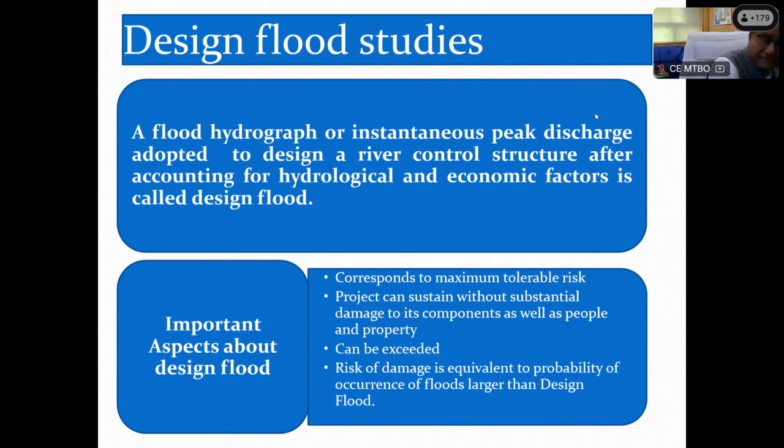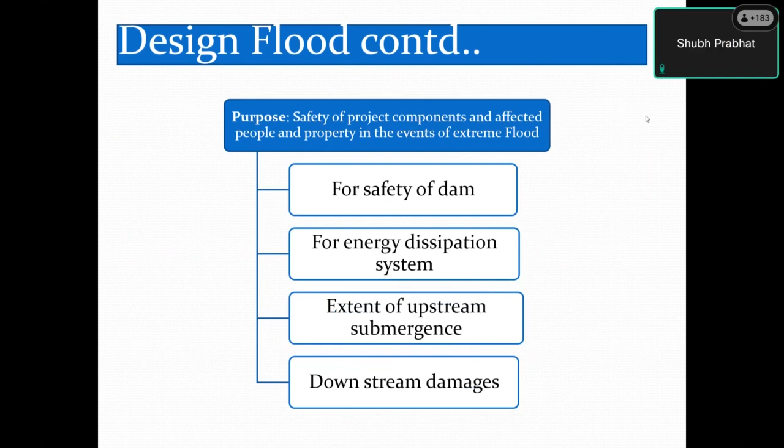Why this problem is coming? मुझे तो क्लिक करना होगा। अगर आप वेट पे जाएंगे तो फिर हाँ। Okay. Okay.

So what is the purpose of the design flood? It is for the safety of the dam, for designing the energy dissipation system, and also sometimes to know the extent of upstream submergence and downstream damages. Normally, if a project is being designed for a probable maximum flood, the upstream submergence shall not be estimated for the probable maximum flood - it depends on the type of settlement of the stream. We can adopt the criteria of 25-year flood or 50-year flood to see the upstream submergence in the form of backwater. For downstream damages, like if a powerhouse is there downstream, to decide its formation level, we again have to consider the probable maximum flood. These are the purposes of design flood estimation.

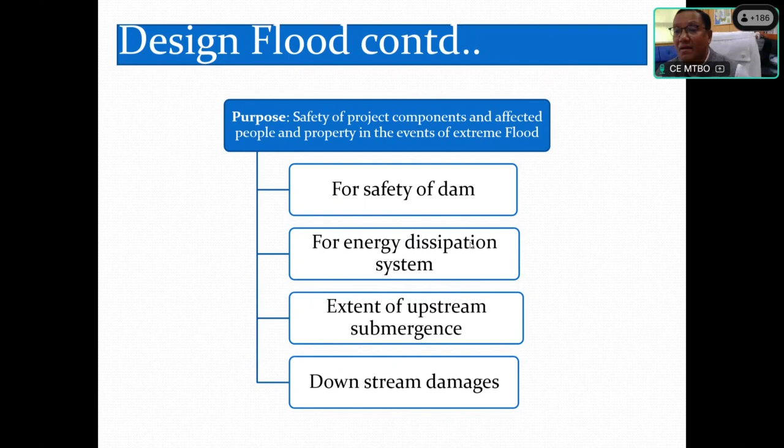Proper selection of design flood is very important, because if we are going to have a very high design flood, then you have to put additional costs for making the spillways. We also have to see the additional cost of structure versus risk of losses to structures, affected people, and property. So we have to think about that.

Now let us come to the point of whether absolute protection is possible. Perhaps that is not possible. If you are thinking like that, that is unrealistic thinking. Increased risk is also not acceptable. So decisions have to be taken somewhere in between.

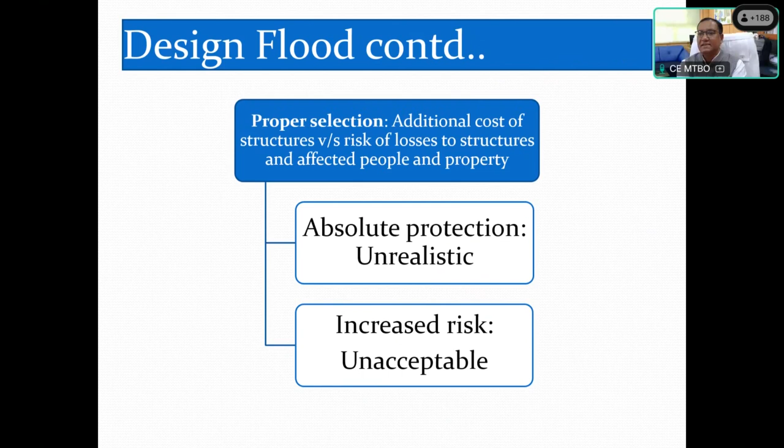Now BIS code has given some criteria, and using those criteria, in India we are following IS 11223:1985 for selection of design flood of dams. As per this criteria, if the gross storage is between 0.5 MCM to 10 MCM (million cubic meters), and hydraulic head is 7.5 to 12 meters, then the structure shall be designed for the 100-year flood.

If the gross storage is between 10 to 60 MCM and the hydraulic head is between 12 to 30 meters, then the structure shall be designed for the standard project flood. If gross storage is greater than 60 MCM and hydraulic head is greater than 30 meters, then the structure shall be designed for the probable maximum flood.

Now, suppose one structure has a hydraulic head of 28 meters, but the gross storage is 80 MCM or 65 MCM. Here, if any of these criteria is meeting, then the design flood shall be selected according to this given criteria of the BIS code. So if your gross head is 28 meters, but the gross storage is more than 60 MCM, then you have to adopt only the probable maximum flood, or vice versa.

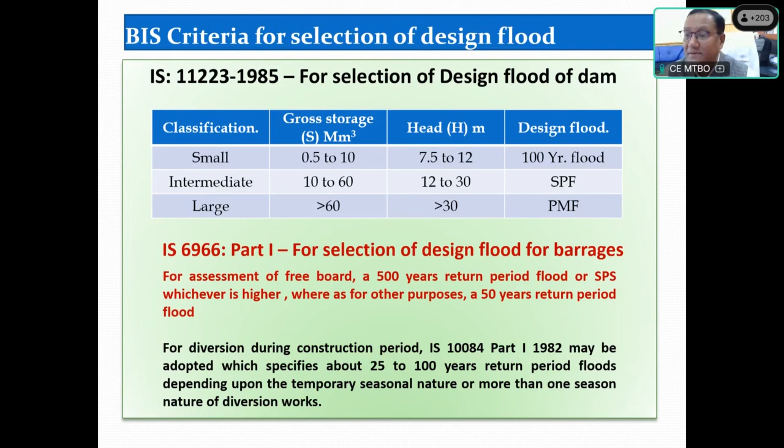After this, now the Dam Safety Act has come in India. As per this Dam Safety Act, the design flood review referred to in clause B of subsection 2 of section 38 of the Dam Safety Act shall be carried out every 10 years. This means for existing dams, we have to go for the design flood review every 10 years, or such lesser period as may be determined by the National Dam Safety Authority.

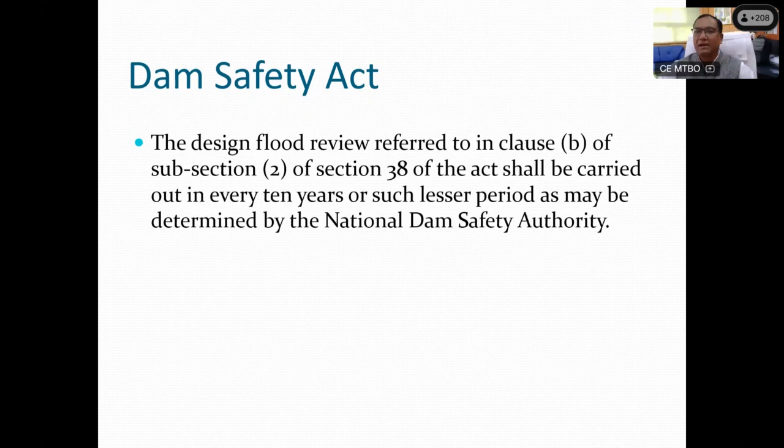Suppose some dam's design flood was reviewed 5 years before, but its design flood has been exceeded this year, then the Dam Safety Authority may recommend that you go for the design flood review again. So minimum 10 years is decided, but depending upon the occurrence of the flood, the National Dam Safety Authority may direct for the design flood review.

What are the different approaches for design flood estimation? Earlier, there were very limited data, so the formula approach was adopted, like Dickens formula, Ryves formula, Nawab Jung Bahadur formula, different types of formulas. But those formulas are based basically on catchment area, and very few observations are available. So those were initial approaches where very limited data was available, and we got some rough estimate. That was the formula approach.

Then came the statistical approach, commonly known as the flood frequency approach. This is a very good approach if you have long-term gauge and discharge data, available for even more than 20 or 30 years. Then this approach can be adopted for design flood estimation. Normally, if the data length is 30 years, you can estimate the 100-year or 200-year return period flood, but we cannot use this 30 or 40 years of data to estimate the probable maximum flood, because its return period may be one in 10,000 years or more. So normally, return periods like 25-year, 50-year, 5-year, 100-year floods can all be estimated using the flood frequency approach.

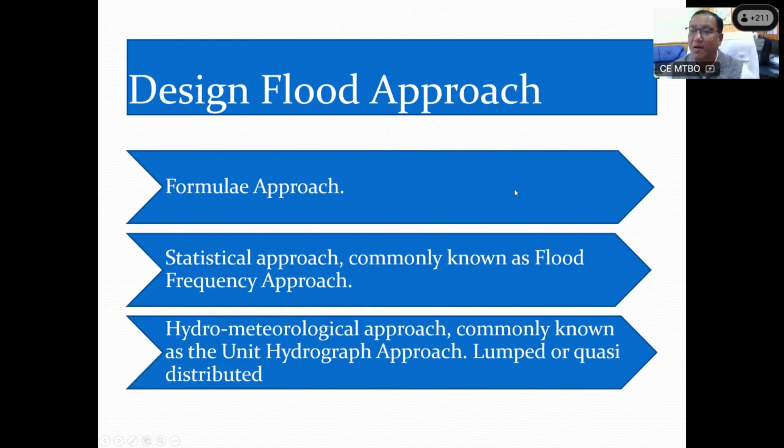Depending upon the catchment size, design flood can be estimated using the hydrometeorological approach, either by adopting a lumped model where a single catchment is used, or a quasi-distributed model where you have to consider a number of sub-catchments of your project catchment if its catchment area is too large.

In design flood computation, I will discuss the hydrometeorological approach here, because most people already know the flood frequency approach. For that, if your flood peak data is available, using Gumbel distribution, log normal distribution, or log Pearson type 3 distribution, you can estimate the appropriate return period flood. Then there are tests like the chi-square test and D-index test to know which is the best fitting distribution for your given data set. Using that, you can go for flood frequency analysis to estimate the particular return period flood.

But in the hydrometeorological approach, we are computing the entire flood hydrograph. This approach involves estimation of the design storm hyetograph or effective rainfall hyetograph, normally called ERH, then derivation of the direct runoff hydrograph from the catchment response function, the unit hydrograph. So this design flood computation involves modeling the transformation of rainfall into a flood hydrograph, and translation of that hydrograph through the watershed to the outlet point.

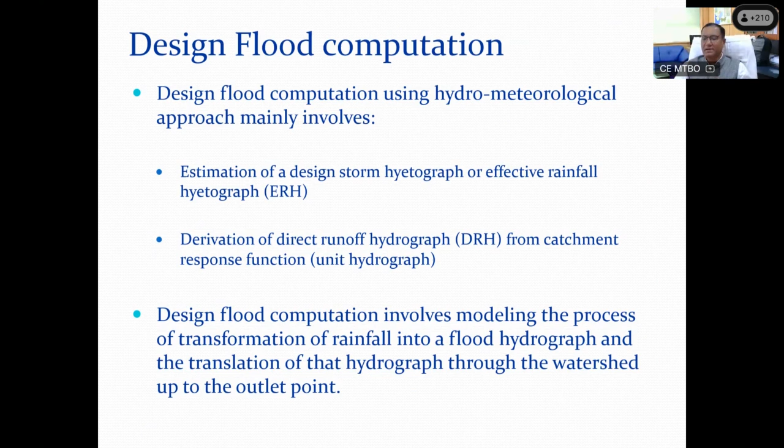From where can you get the design storm depth, because this is the most important part of design flood estimation? The Central Water Commission, in association with the IMD, has published a number of PMP atlases. These PMP atlases cover the entire country. Central Water Commission has published the PMP atlas of the Ganga Basin, Godavari Basin, and Krishna Basin. This was prepared by IMD in the year 2018.

This Ganga and Godavari atlas has been published by Central Water Commission. Then for the Narmada, Tapi, Sabarmati, and Luni river systems, and rivers of Saurashtra and Kutch regions including Mahi, this has been published by Central Water Commission. Then the Mahanadi and adjoining river basins atlas has also been published by Central Water Commission, as have the west-flowing rivers of the Western Ghats and Kerala, and the Cauvery and other east-flowing rivers. Only the Krishna Basin and the Indus Basin atlases have been published by IMD.

This is a very wonderful document because a lot of effort has gone into it. It is a joint effort of a number of experts sitting together, and it took around 3 to 4 years for them to prepare this document.

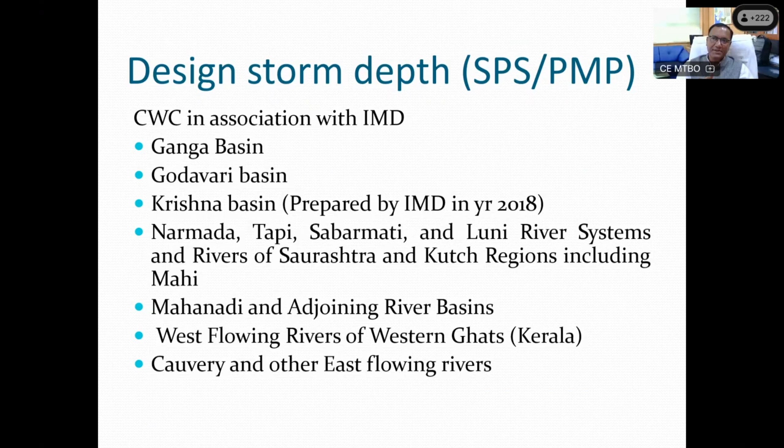You can directly read the value of your standard project storm or probable maximum precipitation using these PMP atlases. What is the beauty of these PMP atlases? For 1 day, 2 day, 3 days, the severe-most storms that occurred are in an inventory, along with the isohyet of those storms and what was their areal extent, and where was the 'eye' location - meaning the location where the maximum depth has been recorded.

For example, this is a 2-day storm in Ganga Basin which occurred during 10th and 11th July 2004. This 2-day storm isohyetal pattern you are seeing here. Similarly, you will get the 1-day storm, 3-day storm, for whatever the threshold limit is.

When I was also a member of that committee guiding the publication of these PMP atlases, in the first instance a threshold value was taken. Suppose for Ganga Basin we considered a 1-day threshold value of say 250 or 300 millimeters. Once this threshold value is decided, all storms with a 1-day recorded depth of more than 300 millimeters were selected. Then the depth corresponding to the second day and third day was calculated - so 1-day, 2-day, and 3-day storms were first selected, and then their detailed isohyets were prepared. This is very useful because making one isohyet itself takes a lot of time if not readily available, and these are historical records - storms occurred in 2004, 2008, 1938.

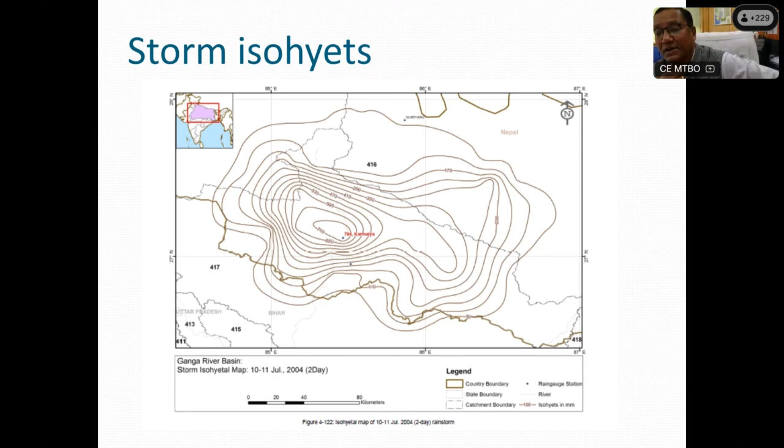At these grid point locations - Ganga is a very big basin with a catchment area of about 10 lakh square kilometers - so at every 1 degree by 1 degree grid, these grid point locations are marked. Once you have mapped your catchment area, corresponding to the centroid of the catchment you can note down the latitude and longitude. Using this figure, you will easily be able to finalize which grid location should be considered for your PMP or SPS value.

This is the map for that, showing the latitude and longitude. Once you have the latitude and longitude of the centroid of your catchment, you can decide the grid. Once the grid is decided, these are the PMP values - this is the 1-day areal PMP estimate for 500 square kilometers. Similarly you can get values for 100, 500, 1000 square kilometers - these areal PMP values are readily available, and from here you can get the design storm depth values.

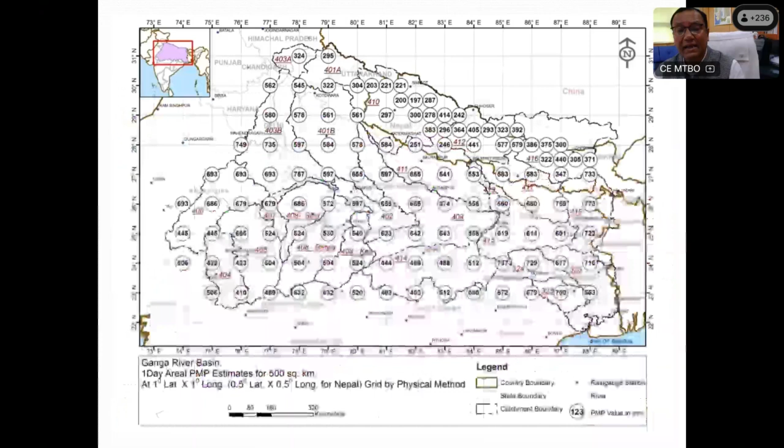So PMP and SPS both, now in tabular form. Once you have finalized your grid location - like G for Ganga, grid named 409-2 - using this map, based on the latitude and longitude of your entire catchment, you can know your grid location and then use this table. Depending on catchment area, suppose it is 800 square kilometers, you work out the SPS value for that. For 500 square kilometers the SPS value is 688, for 1000 square kilometers it is 664, so for 800 square kilometers you can interpolate.

So regarding 1-day or 2-day storm, depending upon the time base of the unit hydrograph, you have to select whether to go for the 1-day storm depth or 2-day. If the time base of the unit hydrograph is between 24 to 48 hours, then you have to go for the 2-day storm depth. So here, the 1-day storm depth corresponds to 31st August 1915, and the 2-day storm corresponds to 31st August and 1st September 1915. So 1-day and 2-day values you can get from these tables, and from these tables, areal value corresponding to area. If your area is not given here and lies in between, then you can interpolate it.

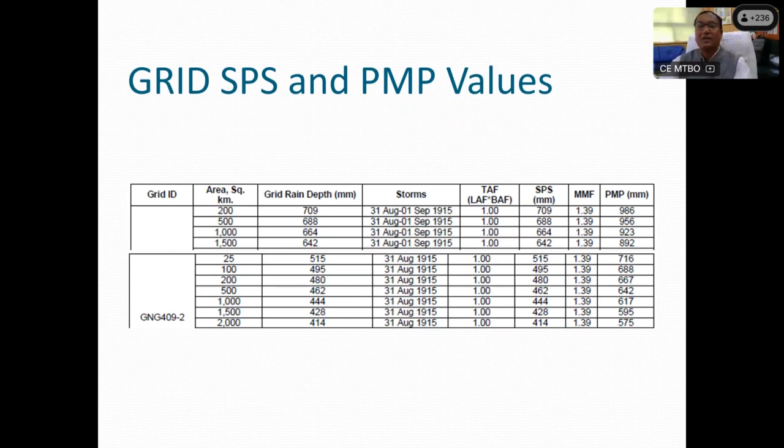Now I've told you how to get the design storm depth values. Next, suppose your project is qualifying for a 100-year return period flood. In that case, IMD has published the isopluvial map. Using that map, you can take the value of 24-hour rainfall depth for different return periods - 50-year, 100-year, whatever is required. So if you want to estimate the 100-year return period flood, you have to take the 100-year return period rainfall value from the isopluvial map published by IMD.

In our PMP Atlas, the 100-year 1-day and 2-day depths are also given station-wise. But the beauty of the isopluvial map is that, based on the latitude and longitude of the centroid of your catchment, you can easily read what the 100-year return period rainfall value will be at that location.

Now, next comes the unit hydrograph. The catchment response function used can be either a lumped system model or a distributed system model. In the lumped system model, as I've already explained, the unit hydrograph is assumed to represent the entire catchment area. But in a distributed model, the catchment is divided into smaller sub-regions, and a unit hydrograph is worked out for each sub-catchment. Each sub-catchment behaves as a lumped model, and from the outlet of one sub-catchment to another, the flood has to go through channel routing.

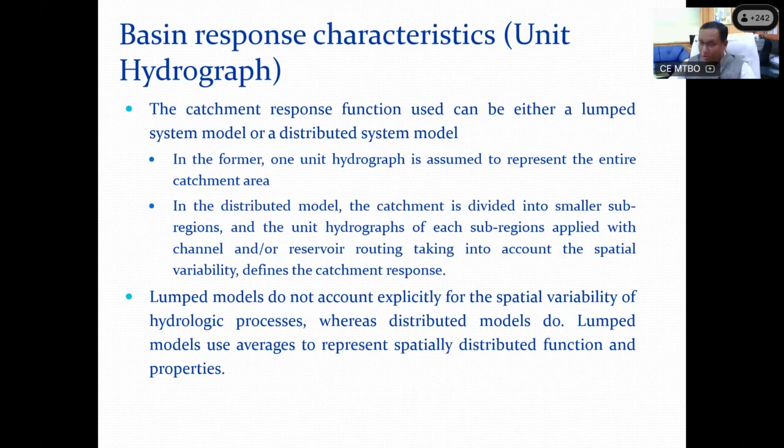Lumped models use average values to represent the spatially distributed function and property. But if the catchment area is small, say 2000 or 3000 square kilometers, a lumped model is more than sufficient. But if your catchment is 20,000 square kilometers, a lumped model is not going to work - you have to go for a quasi-distributed or distributed model.

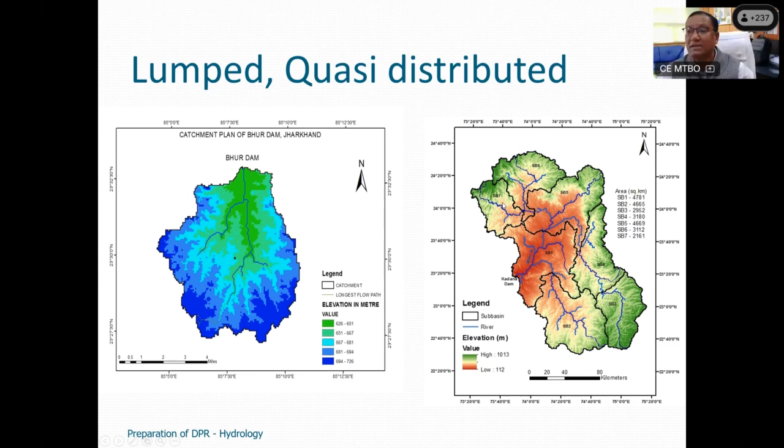This is the example I was telling you about. This is a lumped model - a dam is located here, and this is its catchment area. So here, single catchment, this is a lump. But what you're seeing now is for the Kadana Dam of Gujarat, where the total catchment has been divided into 7 sub-catchments. Consider this sub-catchment - how is this going to work? How do you set up a model for this?

In this setup, each sub-catchment has one outlet. Take SB2 - here the lumped response is received, meaning its flood hydrograph is obtained at its outlet. From this outlet up to the dam site, this flood hydrograph, received at junction 2, will get channel routed through reach R2K and arrive at the Kadana Dam site. There, the lumped response of SB1 will also come, and this entire system response, through lumped and channel routing, comes to junction 5, and from junction 5 it will again be channel routed and arrive at Kadana Dam. So at Kadana Dam, you see 3 dotted lines representing 3 responses: one is the lumped response, another is the channel routed response through R2K, and another is the channel routed response through R1K. These are then combined together to give the flood hydrograph at the dam location.

Like that, this distributed or quasi-distributed model works.

Now, what is the unit hydrograph? This is the response of any catchment for 1 centimeter of excess precipitation. 1 centimeter means 1 unit of excess precipitation in India. Like in our flood estimation reports, we use 1 centimeter depth.

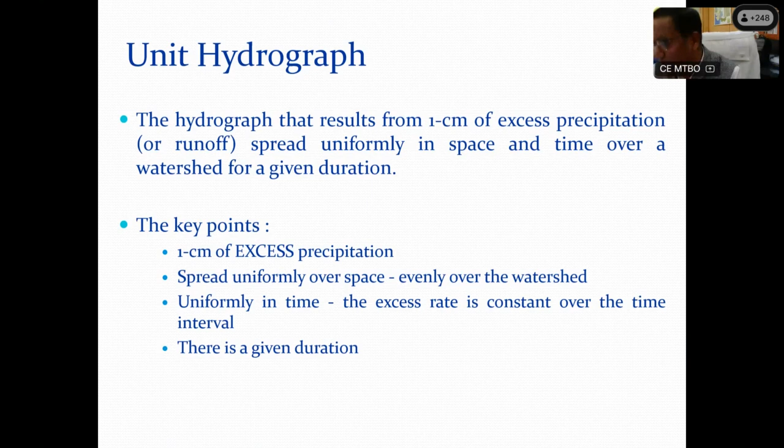If your unit hydrograph is of 2 hours duration, then for convolution you need your rainfall excess ordinate also at every 2 hour duration. This is because the principles of linearity and superposition have to be ensured when going for convolution. So this is very important - you have to keep that in mind.

Now, how can you derive the unit hydrograph? From the observed hydrograph resulting from a storm which fulfills two basic conditions: the rainfall is more or less uniformly distributed over the basin and has a reasonably uniform intensity. Such a hydrograph will generally form a single and sharp peak. But such events are very rarely obtained.

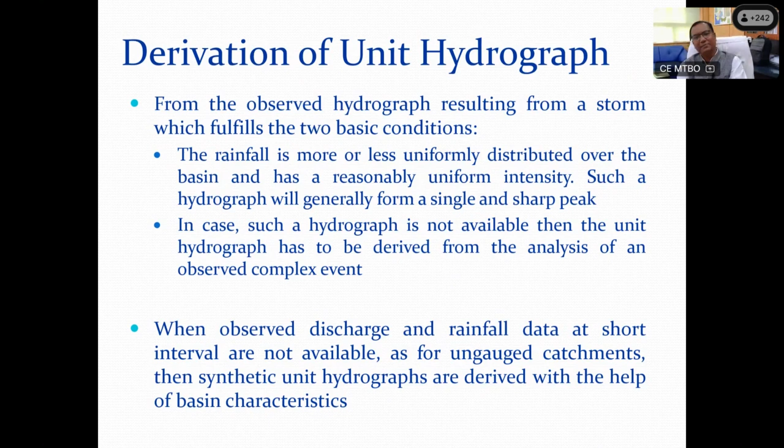In case such a hydrograph is not available, then the unit hydrograph has to be derived from the analysis of an observed complex storm.

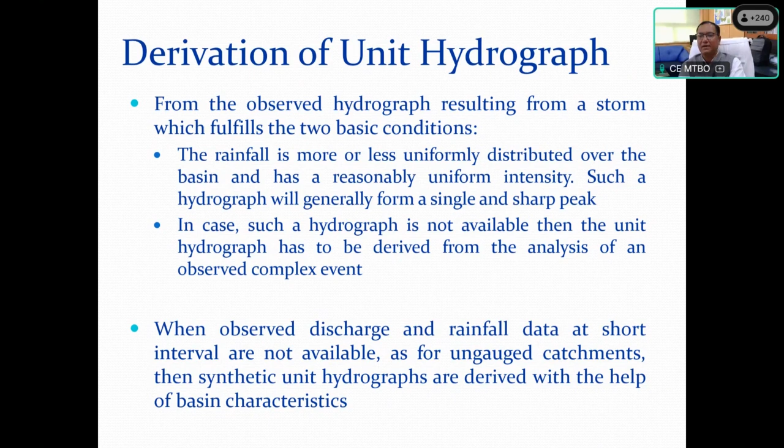When the observed discharge and rainfall data at short intervals is not available, in that case, synthetic unit hydrograph can be used, and luckily in India, when it comes to synthetic hydrograph, there are different methods available.

Most people might be aware of the Clark method, then Nash also. The beauty of Nash and Clark is that if you have observed data, you can get their parameters - like the value of N and K in the Nash method, basically that reservoir storage coefficient K. We can estimate time of concentration using different formulas given in textbooks also.

Snyder method was one of the very popular ones. Then Taylor and Schwartz method was also there. Then SCS method, which is very widely used - but SCS method is for small catchments. For conceptual unit hydrographs like Clark and Nash, we can use any catchment size, but you have to keep in mind that unit hydrograph theory applicability is only up to 5,000 square kilometers maximum.

Depending upon the slope also, if your catchment even has only 5,000 square kilometer area but the slope is very steep, then perhaps you have to divide that catchment into a number of sub-catchments of 1,000 or 2,000 square kilometers, and using quasi-distributed hydrological modeling, you should estimate your design flood.

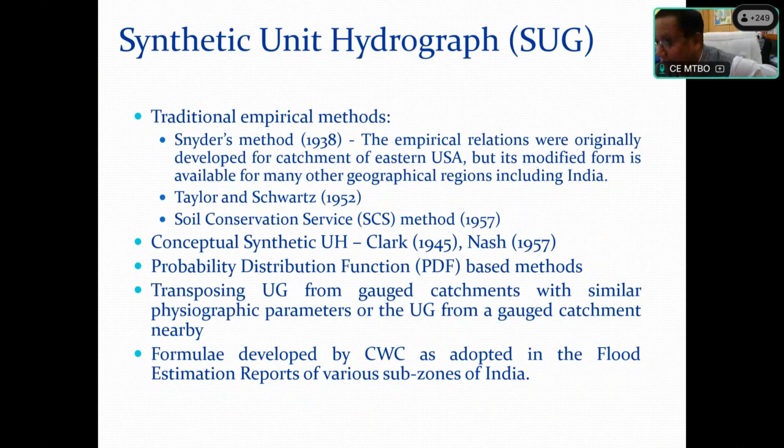Then Central Water Commission, along with data provided by the Ministry of Railways and Ministry of Surface Transport, collected data and based on that prepared flood estimation reports using the Snyder method. A lot of data has been used, and using that data we went for regression, and using those regression equations all the coefficients have been worked out. So this is a very useful publication to estimate the synthetic unit hydrograph at a particular location.

For this purpose, the country has been divided into 26 hydrometeorological homogeneous subzones. For Andaman Nicobar we could not publish, and for southern Brahmaputra also we could not publish. For the rest of the area, reports have been published and are available on the CWC website, which you can easily download.

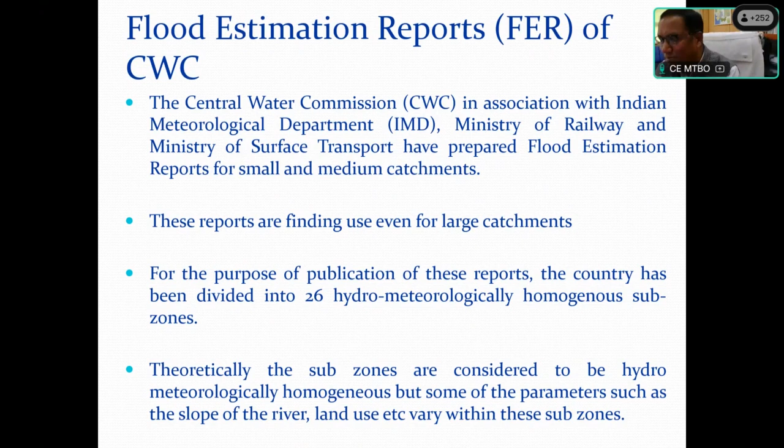Like North Brahmaputra, it is flood estimation report number 2A. For Narmada, Upper Narmada and Lower Narmada, flood estimation report number 3A, 3B, and so on for Godavari. So for all these river basins, these flood estimation reports are available, which you can download.

Now, whenever you go for design flood analysis, digital elevation models, DEMs, are available. Even 90-meter DEM is good enough to estimate the catchment area. If the catchment area is very small, or there is a lot of variability in the geography of the catchment, then you can go for 30-meter or finer resolution, but even 90-meter is usually sufficient.

For a large catchment, suppose I am mapping the entire Brahmaputra at Guwahati, I will go for 90-meter, which is more than sufficient. There the catchment area comes to about 4.2 lakh square kilometers, and using 30-meter you get 4.17 or 4.18. So whenever estimating design flood or hydrological parameters, a 1% or 1.5% variation is hardly going to matter.

So now, because of these GIS advances, it is very easy to map the catchment area. Once you have mapped the catchment area, you have to compute the longest main stream length, called L.

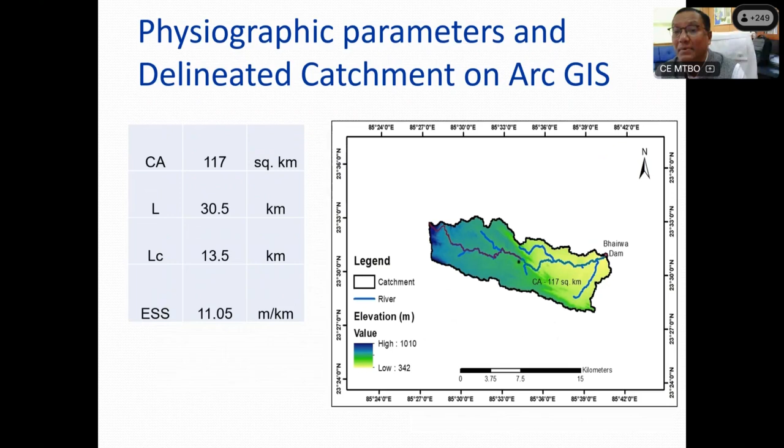And how you can estimate the ESS, you can see in our flood estimation report. It is given. In general, for flood estimation, I'm showing you through this example of the Bhairwa Dam. So now I'm having all these parameters.

Once I've got all these parameters, based on the location of the dam and catchment, I need to know which flood estimation report shall apply here. So this catchment lies in 1G.

Using the 1G subzone of FER, you can get all those parameters like time to peak, QP meaning peak of the unit hydrograph per square kilometer, time base of the unit hydrograph, width of the unit hydrograph at 50% of the peak value, width at 75% of the peak value, and the width measured from a center line drawn from the peak. So all those parameters you shall be able to estimate.

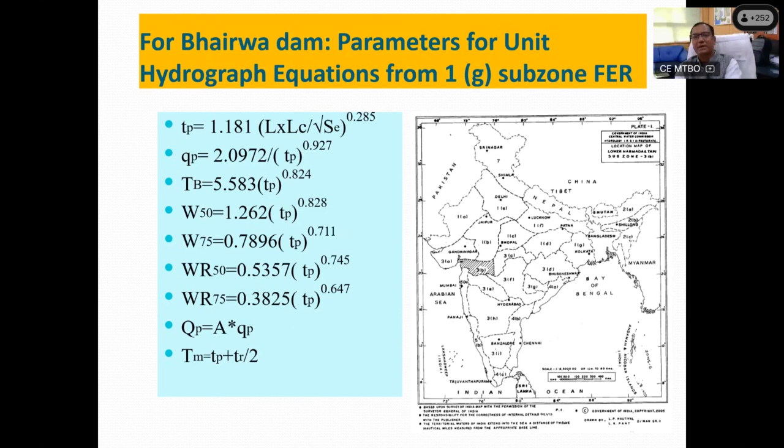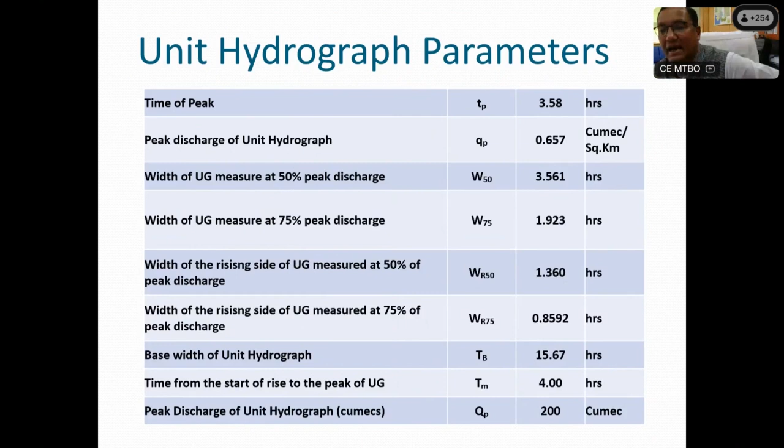So you will get these things like that. I have got the time to peak, TP equal to 3.58, peak discharge of the unit hydrograph per square kilometer, with the unit also given. WR50 is the width of the rising side of the unit hydrograph measured at 50% of the peak discharge, and WR75 is the width of the rising side at 75% of the peak discharge. Now you have got all these parameters.

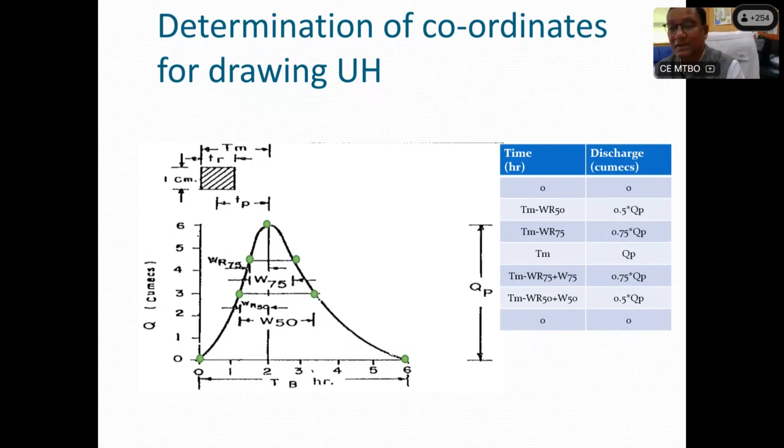Using these parameters, you get a total of 7 points, which are marked. Using these 7 points, you can plot a graph on Excel, and then you have to convert that graph into a bell shape. While making the bell shape, you have to ensure that these marked points, their location and value, should not change.

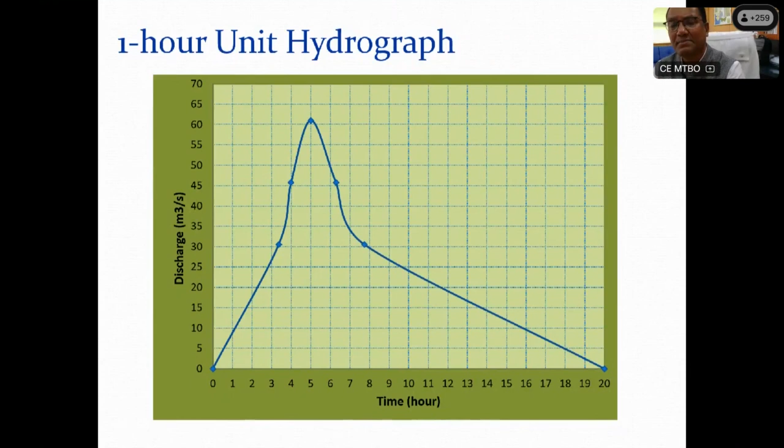So with respect to time and discharge, that value stays fixed, and the rest you can adjust. Then finally you have to test it: suppose your catchment area is in square kilometers, the sum of the ordinates should equal the catchment area divided by 0.36. If you are making a 1 centimeter, 1 hour unit hydrograph, the sum of the ordinates should equal the catchment area in square kilometers divided by 0.36.

So this is the test, this is the check whether your unit hydrograph is proper or not, and you have to see that the shape comes out as a bell shape.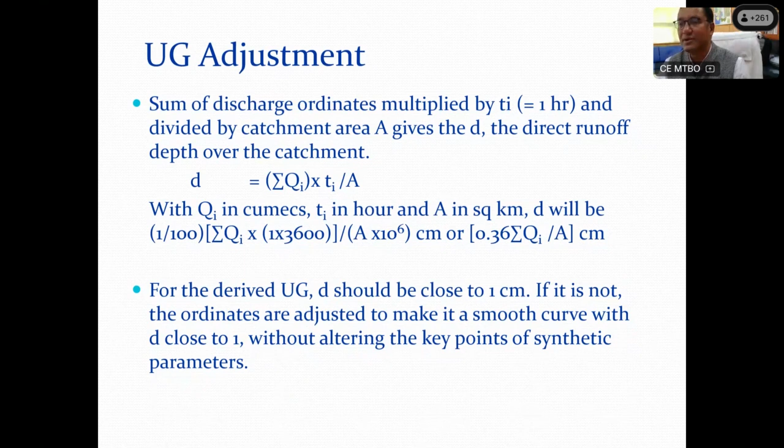So like this, if you see, we have the 7 ordinates shown in blue line, and then we adjusted and made a beautiful bell-shaped unit hydrograph shown in the red line. The sum of the ordinates checks out at 325, since the catchment area divided by 0.36 also comes to 325. It means the hydrograph I have made is the unit hydrograph for 1 centimeter rainfall excess of 1 hour duration for the given catchment.

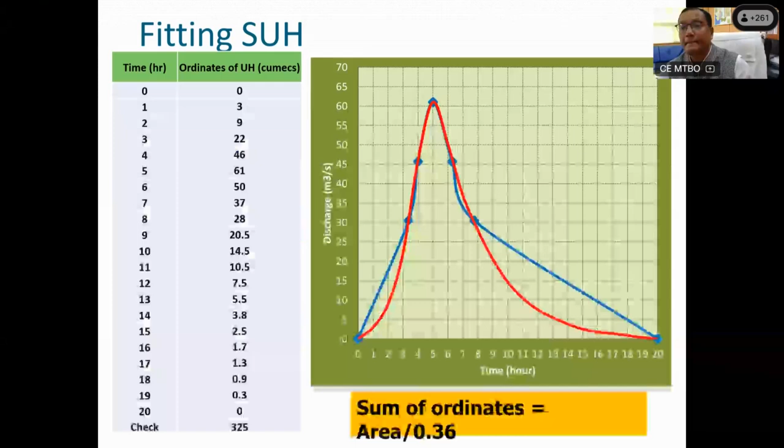Now, once you have the unit hydrograph, you use the PMP atlas. From the unit hydrograph, the base is 20 hours, so I have to consider a storm depth of at least 24 hour depth.

And this project qualified for SPF. So using the PMP atlas, we estimated the 1 day SPS depth, and from the PMP atlas of the Ganga, we got 45.67.

Then for hourly distribution, in India, if you analyze rainfall data, whenever a very severe storm occurs, you'll notice a peculiar phenomenon: in any 12 hours, the rainfall will be around 60 to 70% of the total rainfall. That's why in India, because of this phenomenon, 60 to 70% of rainfall occurs within 12 hours.

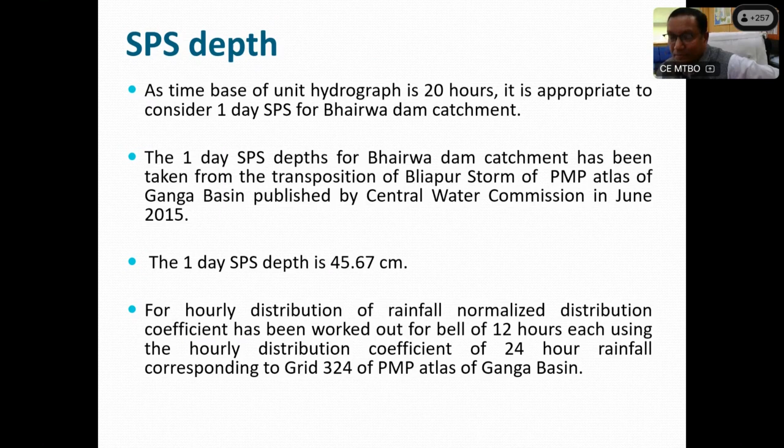So bell theory has been evolved. In bell theory, we take this 24-hour rainfall and further break it into a 12-hour bell. Once you break it into the bell, for each 12 hours you will get the 12 hour depth, which I will show you through a table. This is the 24-hour rainfall depth, and the 24-hour distribution coefficient is also given in our PMP atlas.

In that distribution coefficient, the bold value of 70.4% represents the rainfall occurring in 12 hours out of the total 24-hour rainfall. So if your 24-hour total depth is 200 millimeters, and at 12 hours we get 70%, the first 12-hour depth will be 70% of 200 millimeters, that is 140 millimeter, and the next 12 hours will be 60 millimeter. So that's how 200 millimeter shall be distributed.

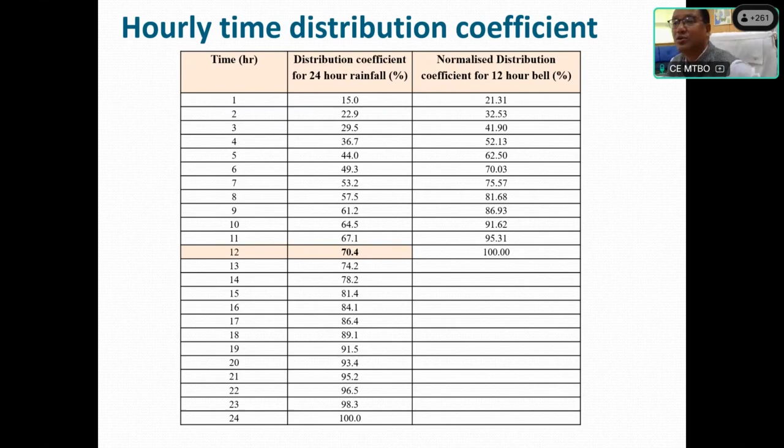Now for each 12 hours, you have to use the normalized distribution coefficient, because now you have the absolute depth value, 140 millimeter, which is 70% of the 200 total 24-hour rainfall. So now you have to normalize this by dividing each ordinate by 0.704. You will get the normalized distribution coefficient for the 12-hour bell, and this distribution coefficient shall be used for the rainfall distribution and effective rainfall computation.

Now, an important aspect: design loss rate. Once you have got the hourly rainfall, then from that hourly rainfall you have to subtract the loss to get the effective rainfall.

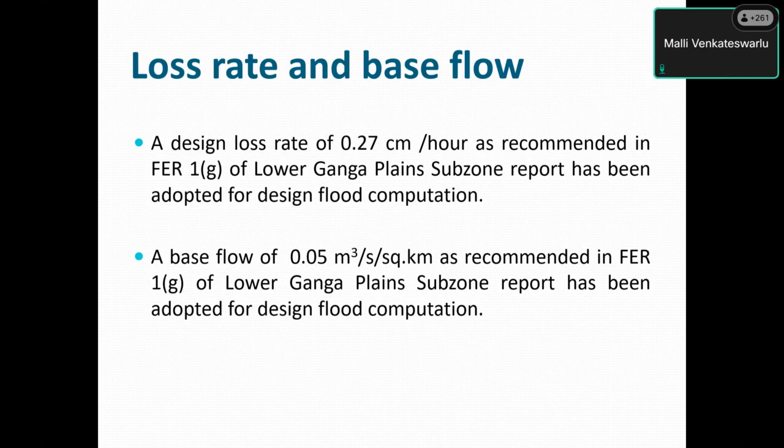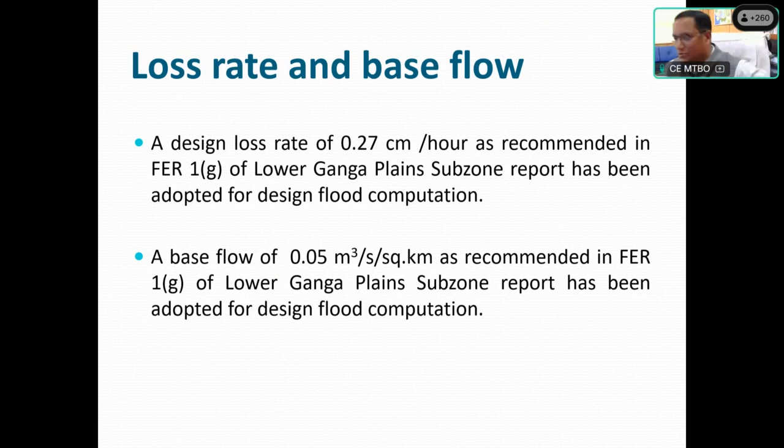Design loss rate is also given in the flood estimation reports, so for that particular flood you have to use the design loss rate of that particular subzone. For this project, which lies in FER 1G, the design loss rate of 0.27 centimeter per hour is given, so that you can take. And base flow is also given, that is 0.05 meter cube per second per square kilometer. These are the recommended values you can adopt.

How are we going ahead further? Once we have got all those things, we convert 1 day rainfall into 24 hour rainfall. What is the difference between 1 day rainfall and 24 hour rainfall? This is very important, everybody should listen carefully.

I think somebody is speaking. Please keep your mic off. There is a lot of noise, somebody speaking.

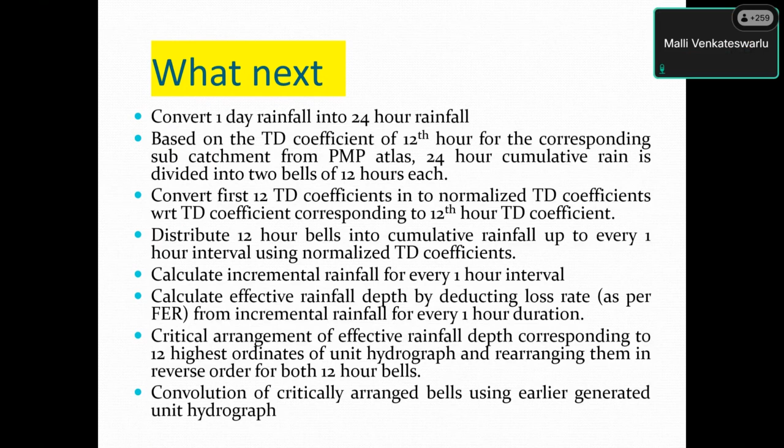How can you go ahead and convert 1 day rainfall into 24-hour rainfall based on the time distribution coefficient of 12 hour for the corresponding subcatchment from the PMP atlas? The 24-hour cumulative rain is divided into two bells of 12 hour each. Then convert the first 12 TD coefficients into normalized TD coefficient with respect to the TD coefficient corresponding to the 12th hour TD coefficient. Then distribute the 1 hour rainfall. Then from that you have to deduct the loss rate to get the effective rainfall. And once you have the effective rainfall, you have to go for critical sequencing, and after critical sequencing, you have to go for convolution.

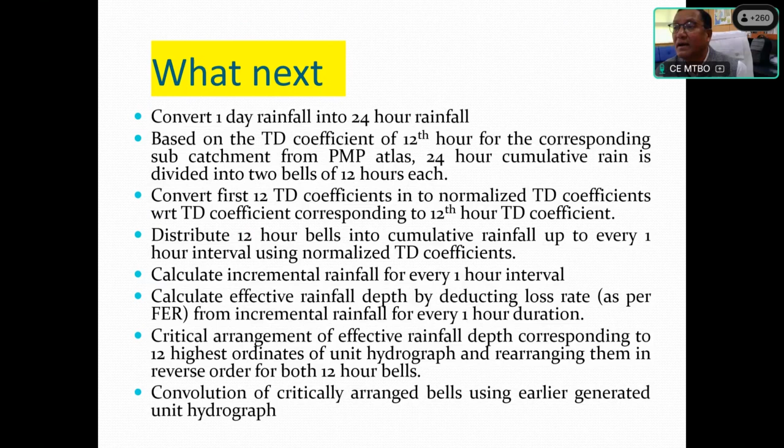Other people who have kept their mic on, please switch off your mics. Mr. Mali Venkateshwarlu, please make your mic off. It is disturbing the faculty, please.

Okay, thank you. So now, in this case, the 1 day areal SPS rainfall from the PMP atlas we got is 45.67, and now we are converting it to 24 hours. Most people will say 1 day is equal to 24 hours. Why are you converting to 24 hours? But fine, we are doing that.

You see, the rainfall is measured at 8 a.m., so 8 a.m. to 8 a.m. is 1 day. But the 24 hour could be 9 a.m. to 9 a.m., 10 a.m. to 10 a.m. of next day, 11 to 11, 1 p.m. to 1 p.m. So that is the difference, because the 24 hour that we calculate can be from any hour, not necessarily 8 a.m. to 8 a.m. of the next day. It will be from any hour to any hour, so that is the 24 hour.

So normally this data has been analyzed, and what we found is there may be a 12% to 20% variation. This means if we consider the one day rainfall compared with the 24-hour rainfall, the 24-hour rainfall was something around 12% to 20% more than the 1 day rainfall. That's why 1 day rainfall is converted to 24-hour rainfall, and for that we apply a clock hour correction of about 15%, because this range was something around 12 to 20%.

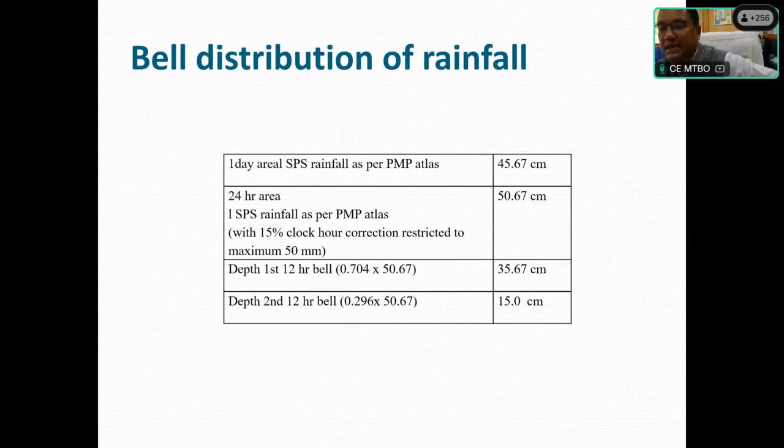Now for the first 12-hour bell depth, we have got 70.4% of 50.67, that is 35.67. Then the depth of the second 12-hour bell, we have got 15 centimeter. Once you have got these, using the normalized distribution coefficient, we get the cumulative depth, and from the cumulative depth, by deducting the previous hour's cumulative rainfall, you get the incremental rainfall of each hour. So finally we have got the incremental rainfall.

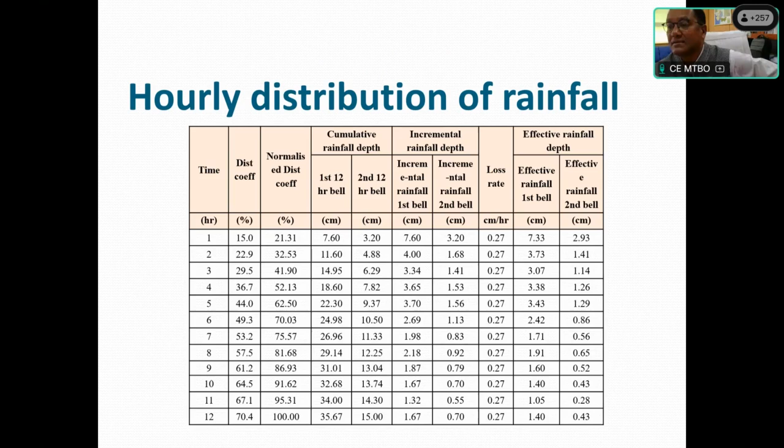Then you have to deduct the losses from each bell, and after deducting the losses, what we get is the effective rainfall. This effective rainfall now has to go through critical sequencing. In critical sequencing, we put the highest value of the effective hourly rainfall against the highest value of the UH ordinate. Then the second highest value of the effective rainfall is placed against the second highest value of the UH ordinate. So like that, all 12 values are placed, once for each bell.

And after that, you have to reverse the sequence. Once you have reversed the sequence, you can go for the convolution using the B1 or B2 sequence, or B2 then B1 — B1 means bell 1, B2 means bell 2. So any sequence you can use.

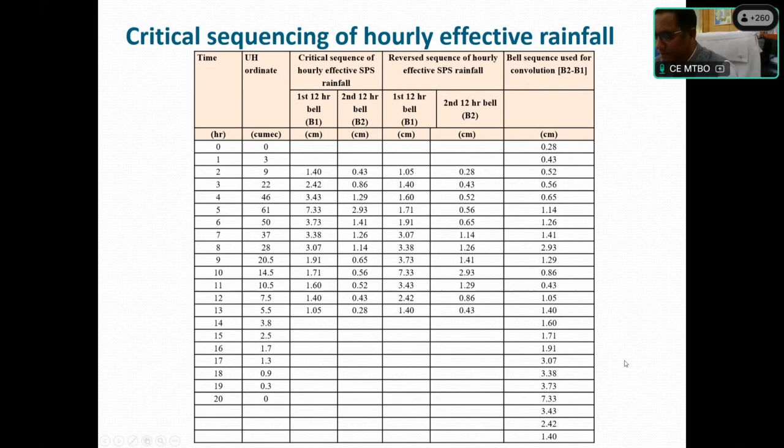If you see the convolution, this is the convolution table where the convolution has been carried out. Here is the time, in the second column we give the UH ordinate, and then the effective rainfall in centimeter. There are 24 ordinates in total.

And because there is a lag of 1 hour between the two rainfall events — since these are hourly incremental rainfalls — you have to give a 1 hour lag, and then add the entire thing to get the direct runoff hydrograph.

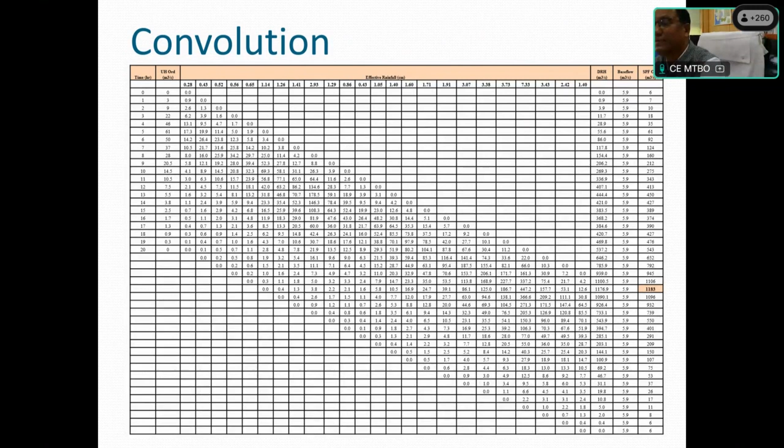So that is the way we do it for a single catchment. Things up to here are quite clear now. Another case, I will explain to you.

This is a very interesting case, and most of you might know about the Sardar Sarovar project in Gujarat. This is a very large reservoir, and the catchment area is also quite large, around 88,000 square kilometer. It is a concrete gravity dam having a length of around 1.21 kilometer, 1210 meter, and maximum height around 163 meters. The catchment area of the river Narmada at the project location is around 88,000 square kilometer. Its full reservoir level is 133.68 meter, maximum water level is around 140.21 meter, minimum drawdown level is 110.64. Gross storage is 9.5 billion cubic meter, that is huge, and live storage is around 5.8 BCM.

When this dam was planned, our BIS code IS 11223 came into effect in 1985, but all these calculations were carried out in 1978-1980. At that time, because the BIS code was not there, there was no standardization regarding adopting the design flood. So designers used to take either the 500-year return period flood or the 1000-year return period flood.

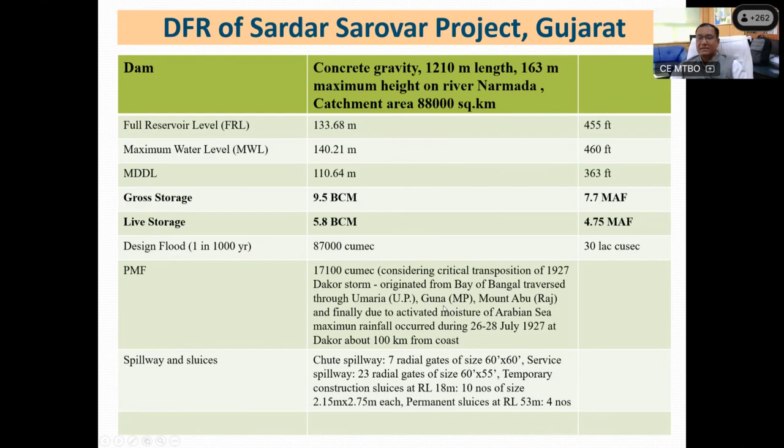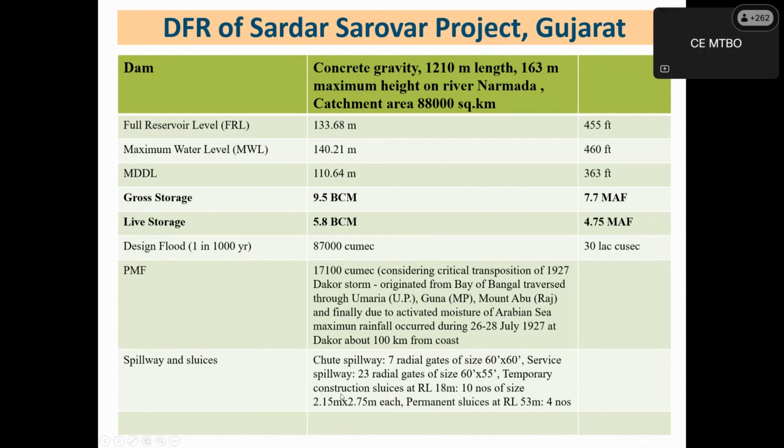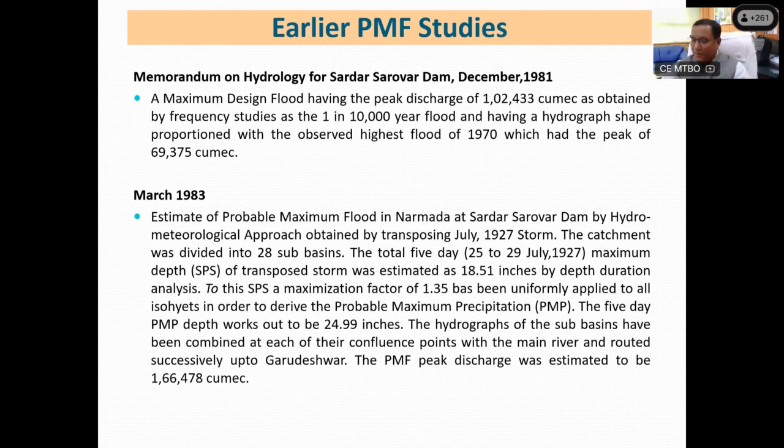Around 4 years before this, the project authority contacted us because their DSRP recommended that its design flood should be reviewed by Central Water Commission, and the value of 1,71,100 cumec given by the World Bank experts seemed quite high. So we went through the data and all the records. We requested the project authorities to provide us all the previous records so we could go through how this flood of 1,71,000 cumec was estimated, and from those records, what we found in summary, I will give key points.

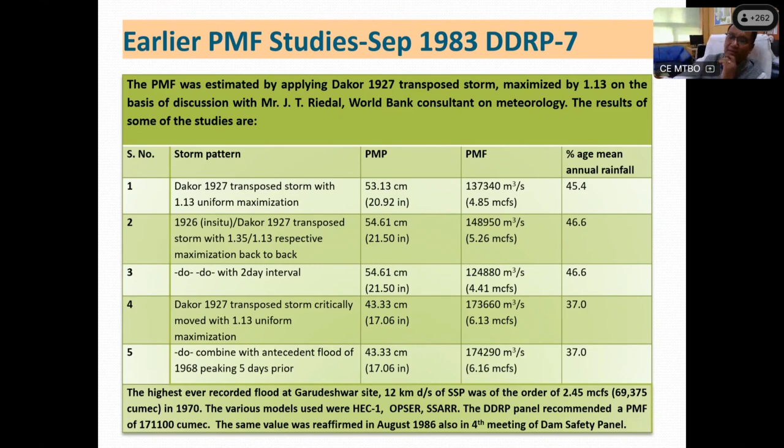There is one place, Dakor, in the coastal area of Gujarat, not exactly near the coast but around 70 to 80 kilometers from it. In that area, a storm occurred in 1927, and that storm was used to estimate this design flood. There were different estimates, and a lot of calculations were carried out, and based on that, this flood value of 1,71,100 cumec was given.

Then we studied whether this Dakor storm should have been considered, because since 1906, IMD was also involved, and at that time the director of IMD didn't agree with the World Bank experts regarding the selection of the Dakor storm. He had given his views in writing, which was later available with us when we went through the record. In his opinion, the World Bank experts—I think that person was from Mexico or somewhere like that—was not well aware of how storm tracks move in India, because that is very important. India is the only country with proper movement of storm tracks, and our IMD is very proud that it has all the track records of the historical severe-most storms.

If he had gone through those records, he would have seen that on 23rd July 1927, a storm occurred from Bengal, but this Dakor storm was not from that storm—it was another storm. When this storm was near Guna, Umaria, it attracted some moisture from the Arabian Sea also, but that moisture came up to Dakor only, and a very heavy storm occurred. But this storm was entirely different.

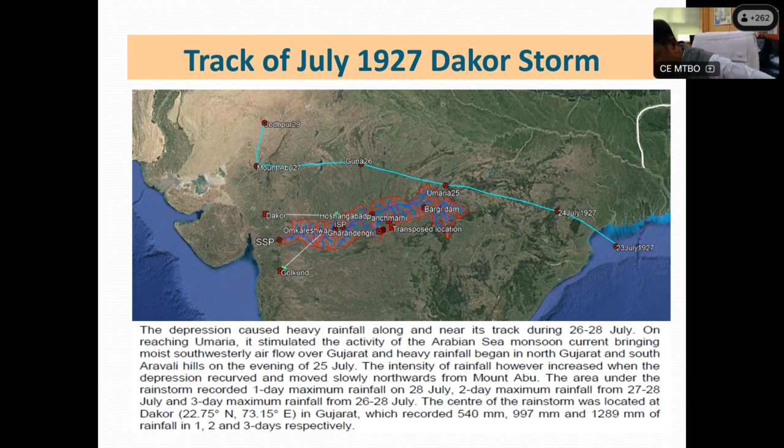This is very well written in our PMP Atlas also, showing the track of this storm. Using that, I have made this slide diagram that you are seeing here, and this is the catchment area of the Sardar Sarovar project, around 80,000 square kilometers. When we got all the records, we went through them and made a brief note about what the follies were in that estimate.

Then we estimated, and one more thing is very important at that time: the dew point temperature data. In Central Water Commission, wherever we have our observatory, we are measuring the wet bulb temperature also. That data is very important because people attending from the field should keep in mind their wet bulb and dry bulb temperature, as it gives us the very important parameter for PMP estimation, that is the moisture maximization factor.

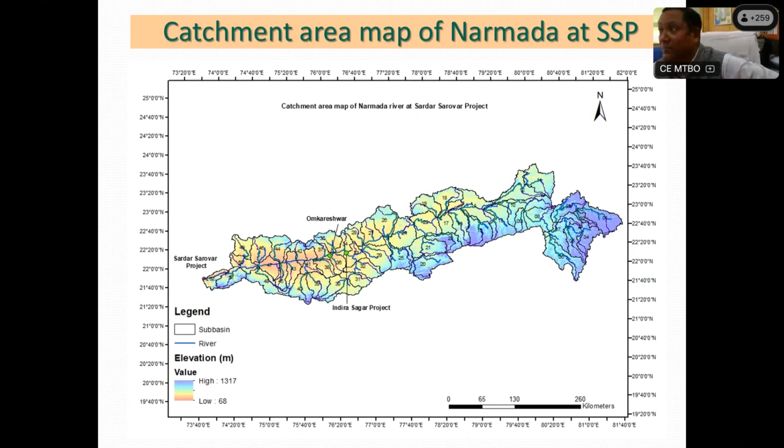Sometimes people don't know why we observe both data—what is the use of that? It is used to estimate the representative dew point temperature when a severe storm occurred. Using that dew point temperature, if you have records of 40 years, then you can know what was the maximum dew point temperature at this location during that fortnight. Suppose some storm occurred on 28 August, then we will see from 16 August to 31st August what the historical dew point data was here. Using that data, the moisture maximization factor is computed, which is very important for computing the probable maximum precipitation.

So here, we used the PMP Atlas of Narmada, and the flood estimation report of lower Narmada and upper Narmada. Luckily, this storm representative persisting dew point temperature data, historical dew point temperature data, everything is available in our PMP Atlas and big data record.

When these people analyzed at that time, dew point temperature data was not available, so whatever records were available on that data, they carried out frequency analysis. In frequency analysis on temperature data, using this method is not advisable, but since the data was very sparsely available, whatever they carried out at that time was okay with the best possible data. I will not put any comment on that. Only thing I have reservation about is whatever storm they selected, its type, its location, its transposition was

completely wrong. IMD had clearly pointed out at that point of time that whatever you are selecting, I don't agree with you, but yes, World Bank is World Bank, they are experts. Because a lot of people from other countries are also coming, and they have very little knowledge about the meteorological phenomenon in India, hydrological phenomenon in India. So whatever they are observing in their country, their thought process may be going like that. That might be the reason.

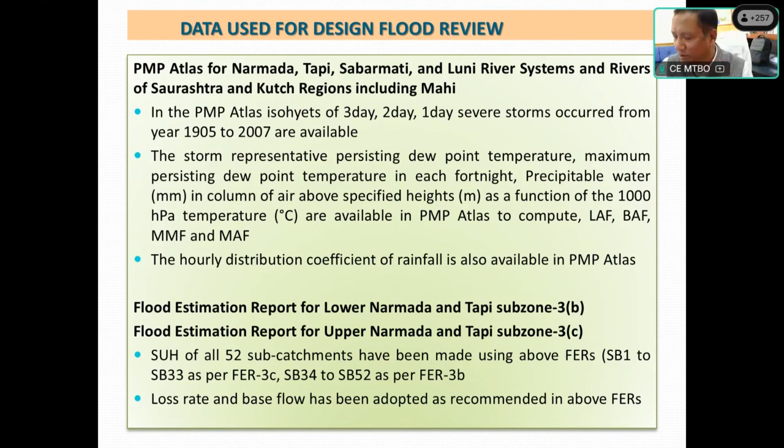Then here, the best thing is the area for transposition. If you see, because this is a large catchment, there is a WMO guideline, and this guideline is applicable for every country throughout the world. It is followed. So what is given here? If you go as per WMO guideline, for nearly flat regions, transposition can be considered up to 2 degree by 2 degree.

Means suppose you make a square and put a point in the center, so up to 2 degree on either side, east, west, north. 2 degree means something, and in India you can consider up to 200 kilometer. So up to 200 kilometer east, west, north, south of your location, sparing the Himalayan region. In the plain region, considering there should not be any barrier, any storm that occurred can be transposed to the project catchment to estimate the probable maximum precipitation.

Then there is another thing - in the nearly flat region, but in the mountainous terrain, there is restriction. It should be 0.5 degree by 0.5 degree to 1 degree by 1 degree. This is a para mentioned as per WMO 1986. Now, coastal storms, meaning storms centered west of Western Ghat and east of Eastern Ghat, were not transposed to the catchment located far inland, because that is the phenomena, the orography of the nature, and because of the barrier, we cannot go beyond that. So for coastal storms, we can go up to 50 kilometer, 100 kilometer, but not beyond that.

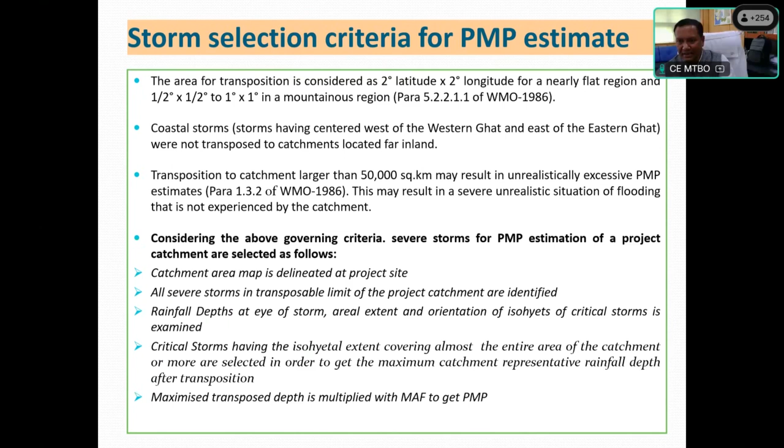So here we have considered these storms: the 3-day Gharadengri storm dated 13th to 15th September 1998, the 3-day Golkund storm dated 4 to 6 August 1968, and the 3-day Dakor storm. This we also considered, though I have written that this cannot be considered as per WMO guidelines. However, since it was adopted earlier by the World Bank people, so only for computation purpose, to verify the computations, we have adopted this. And also the 3-day Panchmarhi storm.

So here, this 3-day Dakor storm cannot be transposed. All other storms can be transposed as per WMO criteria.

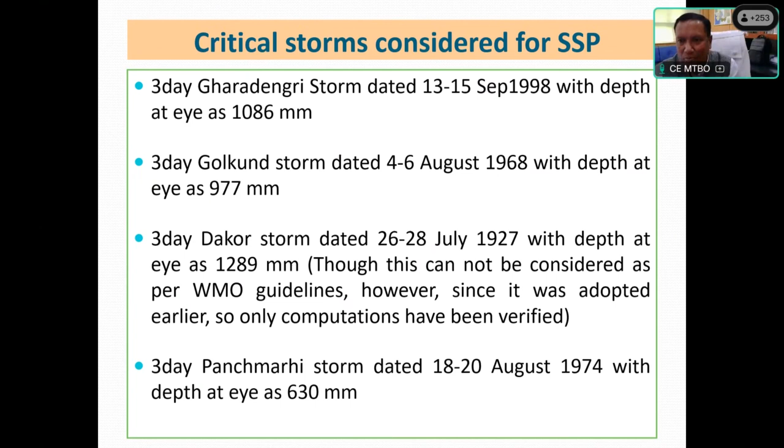Now, these are the locations what you are seeing. This is the Sardar Sarovar project. This is the Golkund storm, and whenever I am bringing this storm from here to here, then you can see whatever is seen at this location. This is the barrier, so barrier correction factor has to be applied here also. One hillock is there, so that will act as a barrier. For Dakor also, but no barrier correction factor was applied.

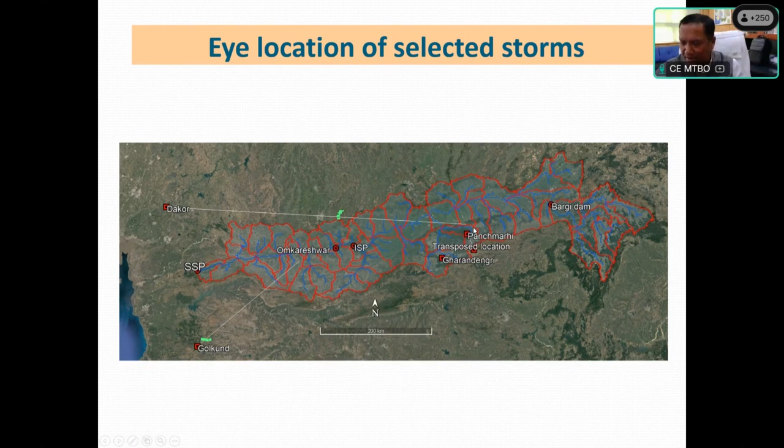And there was another storm, Panchmarhi, Gharandengri, all those were just inside the catchment only, so this can be very well transposed in the catchment area to estimate. Now, whenever we are selecting storms, it should cover the entire catchment, and you are seeing this is an elongated catchment. But when we use the Gharandengri storm, here what you are seeing is the full depth at eye, 3-day.

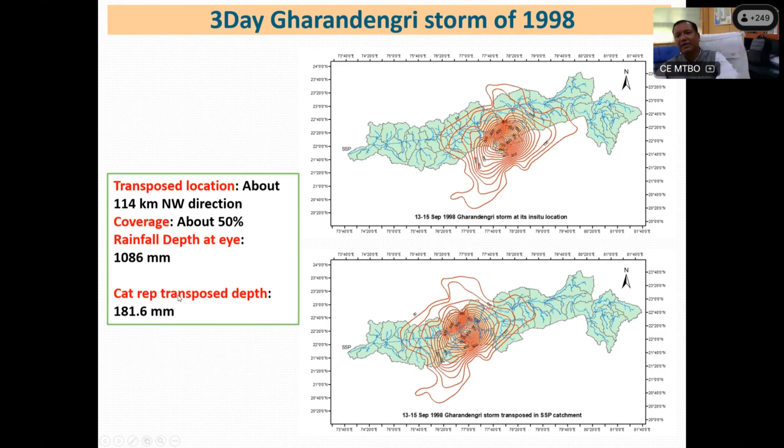In 3-day, total depth at eye at Gharandengri. Gharandengri storm means that the eye of the storm was at Gharandengri. This is the Gharandengri location, what you are seeing, the situ location. This is the eye location, in the center. At eye, the rainfall depth was 1086. After transposition, what we found is that the catchment representative transposed depth is 181.6 millimeter only.

And the transposition adjustment factor - these factors, since time is short I cannot explain all of this, but please download our PMP atlas and see how these factors are calculated, it is given there. That is called the transposition adjustment factor. First you have to get the transposed depth, then multiply that transposed depth with the transposition adjustment factor. That will give you the SPS at that location, the standard project storm. Now multiply that SPS with the moisture maximization factor, and that will give you the PMP value. So that is why these factors are used.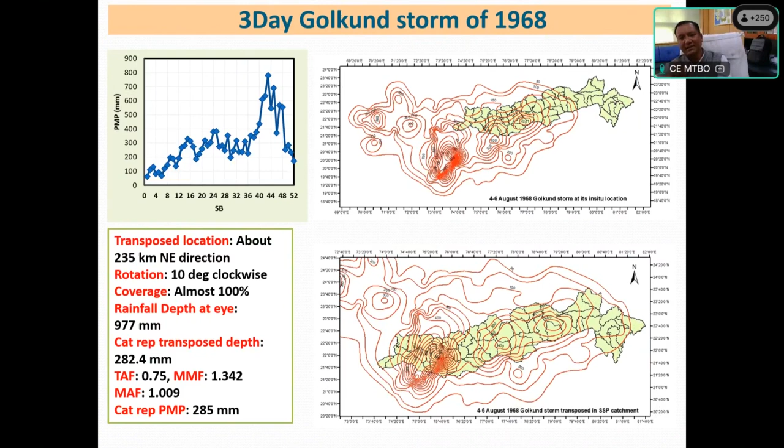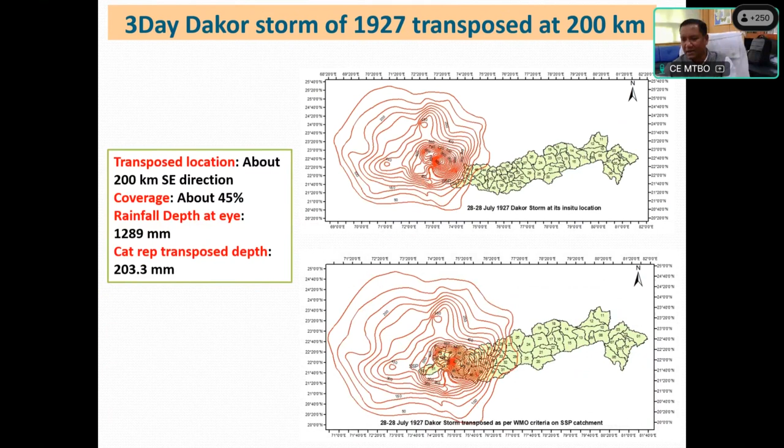So here the catchment representative PMP we have got is 285 millimeter. Now this is the 3-day Dakor storm. So up to where the Dakor storm can be transposed, that we have also calculated, and here the catchment representative transposed depth we have found is around 203 millimeter.

Then the 3-day Dakor storm, critically transposed, 1927. Now we have transposed - here the catchment representative PMP we have got is 341, TAF 0.76, MMF 1.40, MAF about 1.06. And here what we are getting is MAF 1.06, but they had taken the MAF as 1.35, around 30% more. So that was one of the reasons. But actually it is 1.06 because at that time the dew point temperature data was not available for such a large period. That was the reason they used frequency analysis to estimate the maximum dew point temperature.

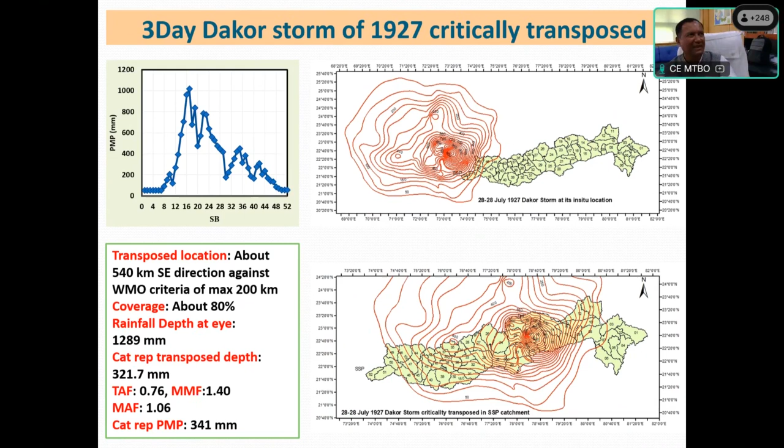That was the reason. Now, the 3-day Panchmarhi storm, this is a very ideal storm. If you see here, for every subcatchment - we have made a total of 52 subcatchments - for each subcatchment, the number of subcatchments are getting a good amount of PMP values, almost uniformly distributed, and it is covering the entire subcatchment area.

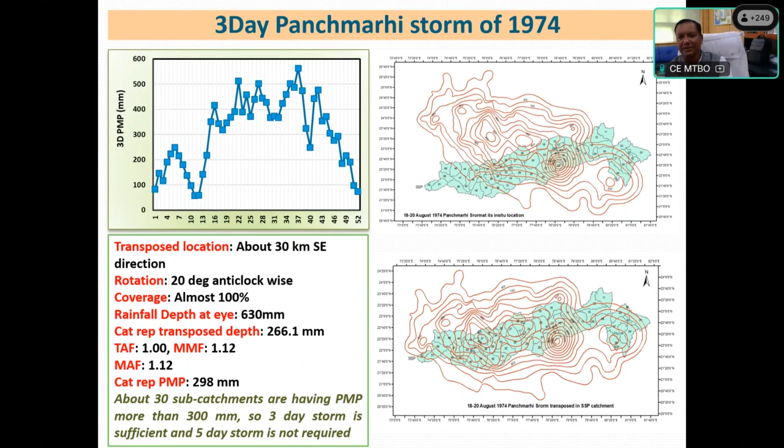And after rotation, we are perfectly aligning this storm along the flow of the catchment also, and along the flow of the river also. So here we have got the catchment representative PMP as 298 millimeter, and about 30 subcatchments are having PMP values of more than 300 millimeters. So a 3-day storm is sufficient and a 5-day storm is not required. Now, this is the detail of the Panchmarhi storm.

So using all those storms, we calculated the PMP values. These are the unit hydrographs of all the subcatchments, and for each subcatchment I will show you directly. Once we have got all these parameters, the PMP value, then we have made the quasi-distributed model.

This is a quasi-distributed HEC-HMS model, a lot of elements are there because there are 52 subcatchments and 38 channel routing reaches.

To get the critical estimate of PMF, no reservoir routing from the upstream projects has been carried out because we wanted to estimate the maximum flood. Though Indira Sagar project has huge storage and could be used for reservoir routing, since there is no dedicated flood cushion in the Indira Sagar project, to estimate the probable maximum flood of the downstream project, no reservoir routing should be carried out.

If we had a dedicated flood cushion, then considering that, we could have gone for reservoir routing. That's why we did it this way.

Then about 208 kilometer reach of the SSP reservoir, this Sardar Sarovar, having 7 routing reaches, and 43 kilometer reach of the Omkareshwar reservoir having 2 routing reaches, and 57 kilometer reach of the Indira Sagar project, because these projects are in cascade, ISP having 2 routing reaches, and 90 kilometer reach of Bargi reservoir having 1 routing reach.

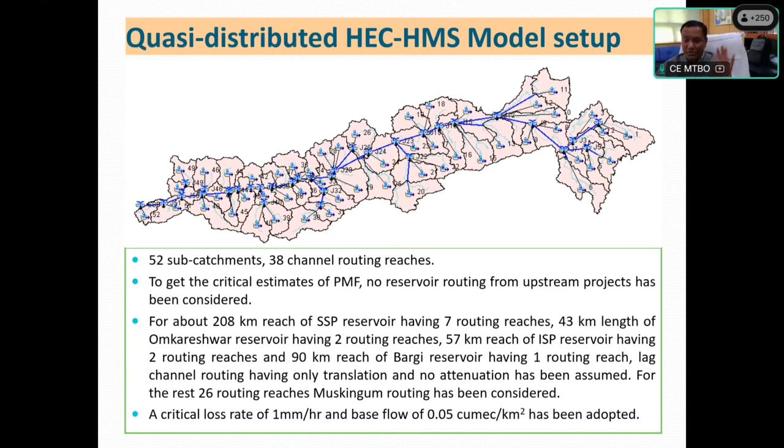There is no attenuation. Then critical loss rate we have considered as 1 millimeter per hour and base flow as 0.05. So all these things we have considered critical, and you will see these are the lag routing parameters.

The rest of the river reaches we have considered using the Muskingum routing parameters, and here also we have ensured that in Muskingum routing, delta T, meaning the time step. If your flood hydrograph is at every 1 hour interval, then delta T should be greater than or equal to 2kx, where k is the travel time and x is one of the weighing parameters. So x hardly matters, the important thing is k and delta t.

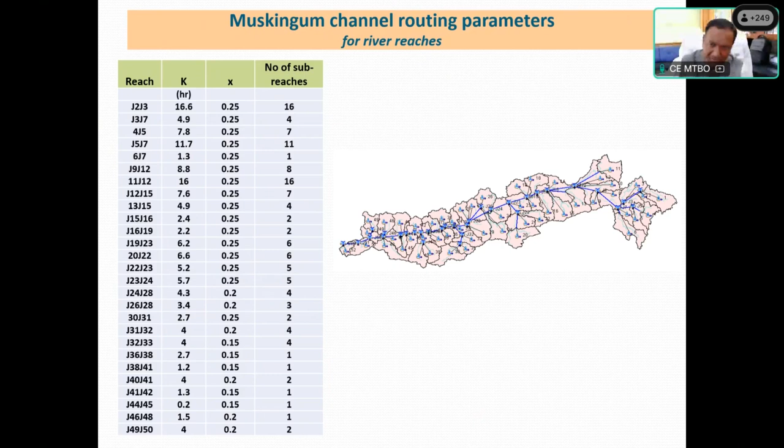So for that, suppose my routing reach length is 70 kilometers. I cannot carry out the routing in one go, because then the routing algorithm would become unstable, like in hydrodynamic routing with the Courant number. Same way here, delta t should be greater than 2k if it's working like a Courant number. So you have to divide that routing reach into a number of sub-reaches, and what you are seeing here is how many sub-reaches have been used, that is given.

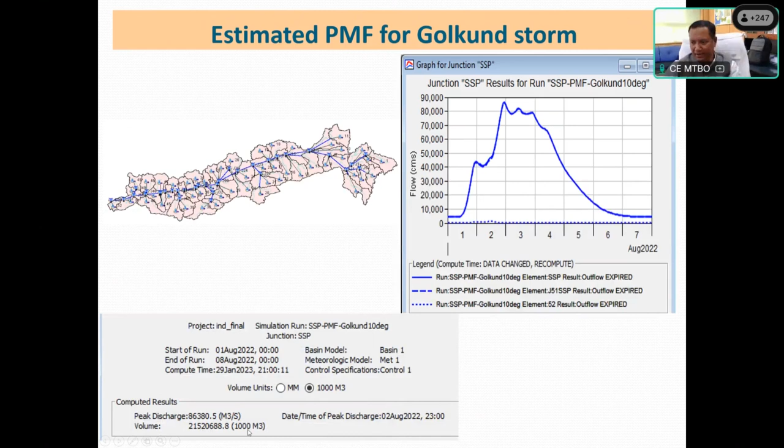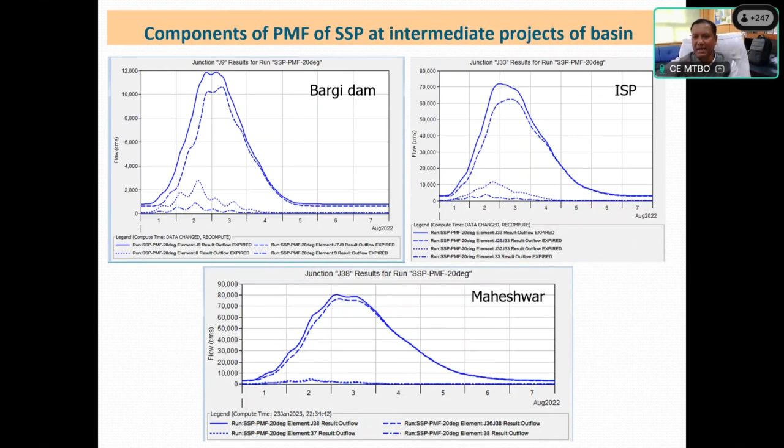These are the other upstream locations. If I put my storm like that to get the maximized depth, then at ISP, at Bargi Dam and Maheshwar, what will be the flood hydrograph? Because this is an integrated model, you can get everything.

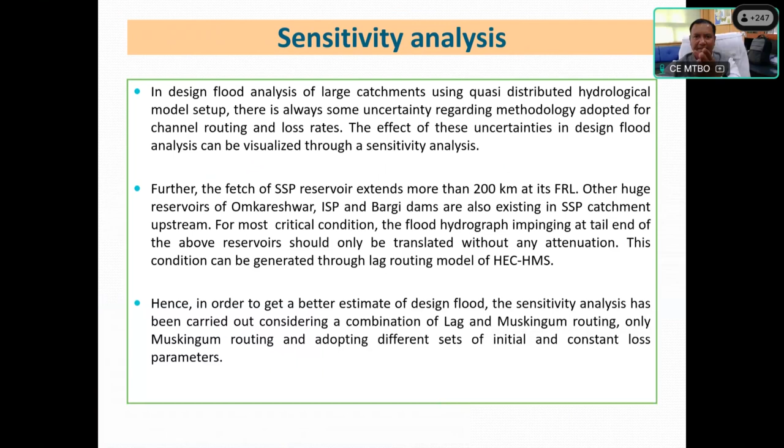So using the Dakor storm also we calculated. Then sensitivity analysis we also carried out by changing the loss parameter and all those things, and this is the important part we have tabulated here.

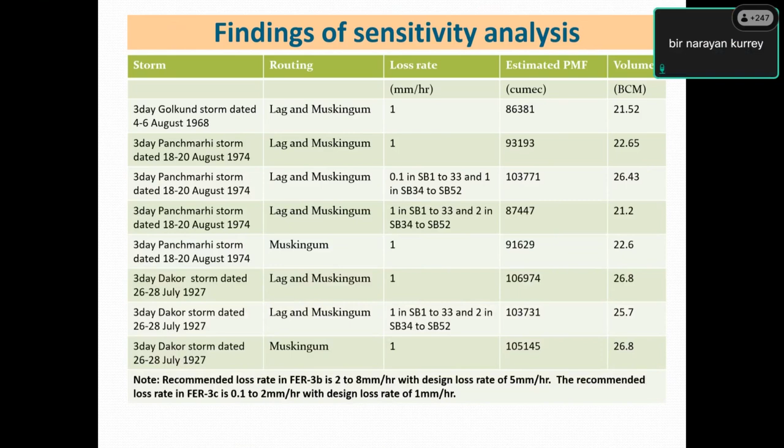Golkund storm, lag and Muskingum routing method, loss rate 1, we are getting 86,000 and the volume of the flood hydrograph, because this is a storage project, so not only peak, you have to consider how much volume is associated, around 21.52 for the 3-day Panchmarhi storm. Now, corresponding to the Dakor storm, we have got 1,06,974.

Corresponding to Panchmarhi storm, here we have got 1,04,000 cumec.

It means earlier estimate was 1,71,000, that was wrong. And since the Dakor storm cannot be adopted, what we have clearly written from Central Water Commission side is that whatever earlier study was carried on by the World Bank, that should not be adopted at all.

Their experts could not understand the Indian meteorological phenomena, and your revised PMF is now of the order of 1,03,700 cumec. So that has been now adopted, and we have carried out further analysis using flood frequency using Garudeshwar BR also, and here we have got 1,09,000 value.

So whatever 1,04,000 and another important associated volume, if you see here, corresponding to 1,03,000, around 26 BCM. And here in the case of Dakor storm, 26.8, here 26.4, both are comparable.

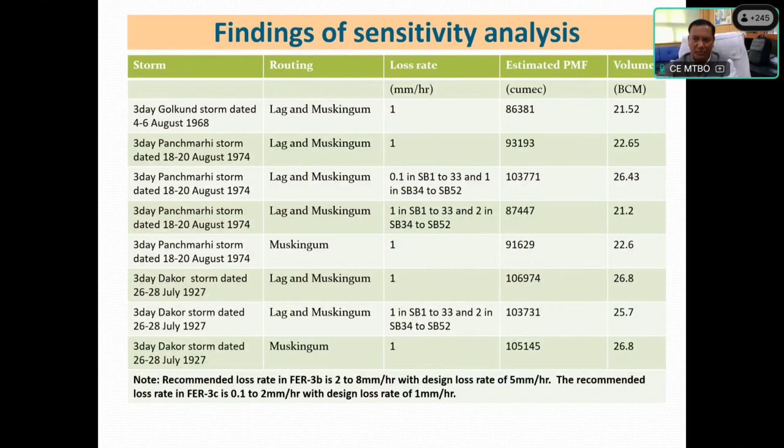So that's why we have told that now your PMF you should adopt 1,03,700 cumec, and using that for most critical condition also, what we have is 10% gates, because it is given as per BIS code that if there are 30 gates, you consider 3 gates inoperative, because that possibility may happen.

Some of the gates you might not be able to open, so you consider 10% gate inoperative, and using 10% gate inoperative also we have carried out this reservoir routing, and what you see here the maximum water level is going something around 141.2 against the top of dam which is 146.50.

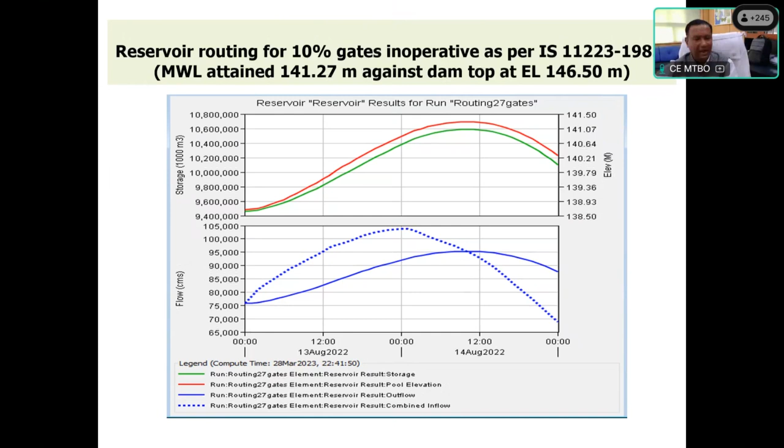So now using different scenarios, sensitivity analysis, and all those things, what will be the upper limit and lower limit, then 1,04,000 cumec is sufficient. That is the good estimate of the probable maximum flood.

So conclusion: proper selection of storm depth for design flood should be ensured. For small catchment, the storm depth values may be adopted from PMP atlases published by Central Water Commission and IMD. For large catchment, selected storm should be transposed, and SPS/PMP values should be computed after applying necessary adjustment factors like location adjustment factor, barrier adjustment factor, and moisture maximization factor.

Transposition to catchment larger than 50,000 square kilometer may result in unrealistically excessive PMP estimates, and this may result in a severe unrealistic situation of flooding that is not experienced by the catchment. Hence, in case of large catchment, utmost care should be taken in storm selection and transposition for PMP computations.

A rational selection of storm considering the storm track - how storms generally move in India - influencing factors for storm centering, and storm transposition limit needs to be decided carefully in order to obtain a reliable estimate of PMP depth over the subcatchments and consequent PMF estimate through a detailed sensitivity analysis.

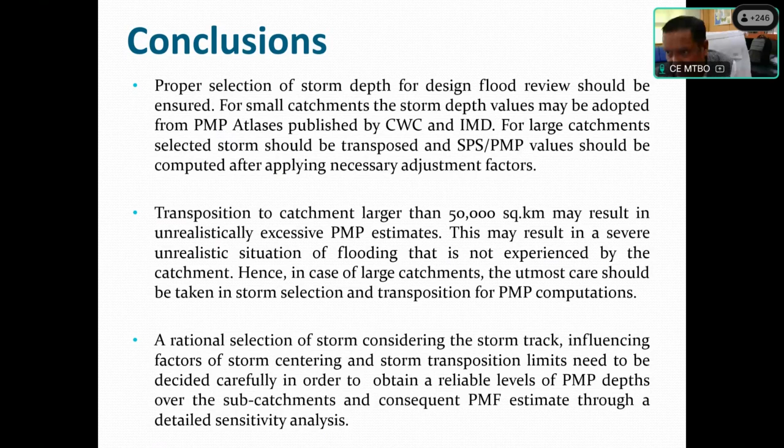So my presentation ends here. Now, if there is any question from you people, then you can ask.